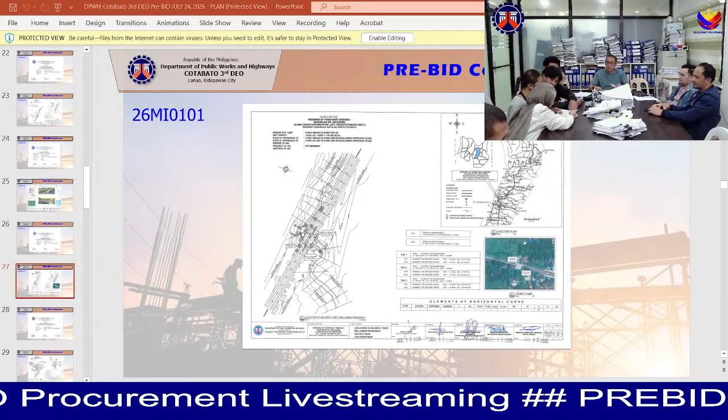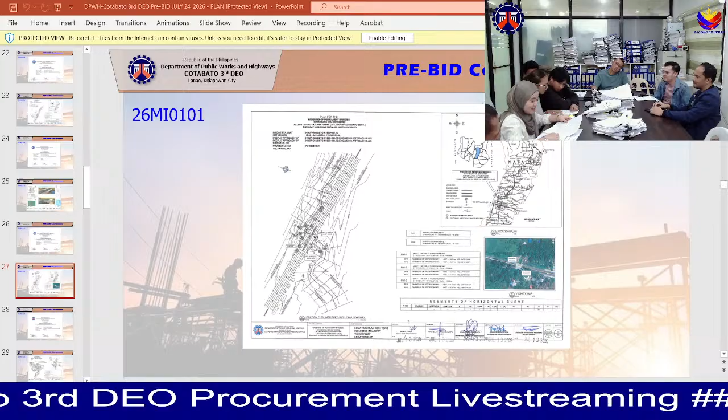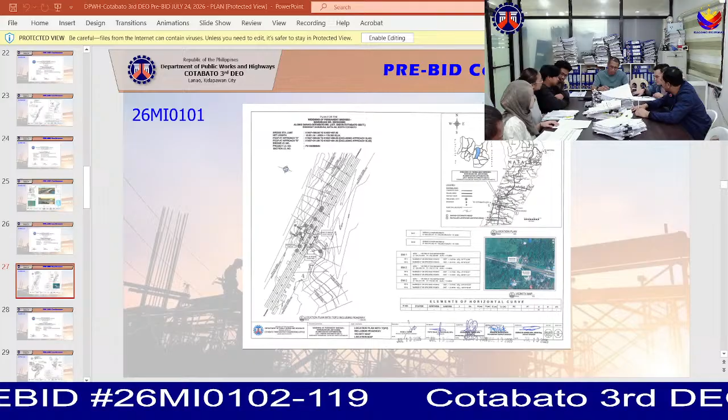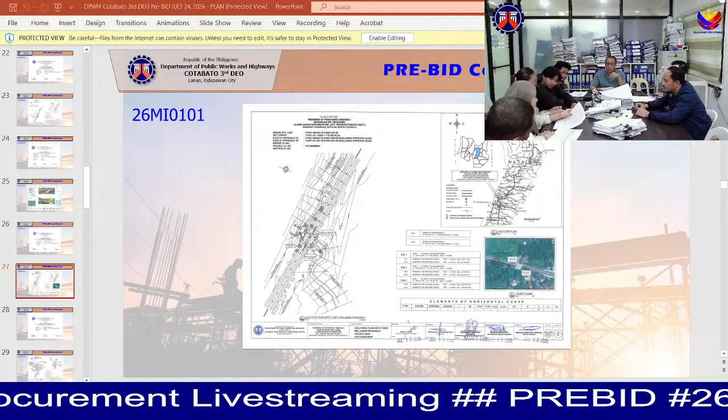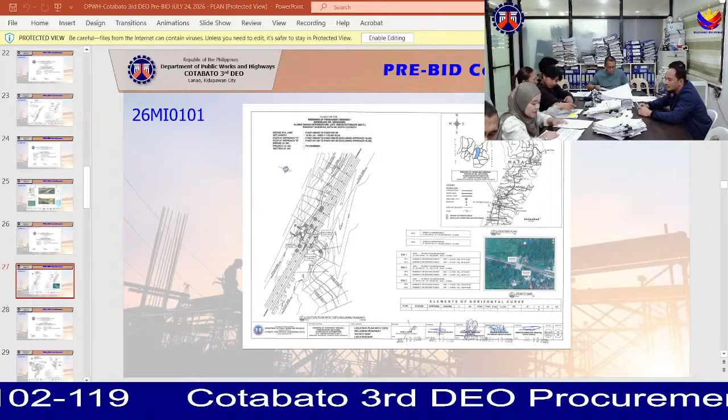So it is good afternoon po once again. For the 12th project with the contract ID number 26MI0102, the project name is Widening of Permanent Bridges, Mutian Bridge P00319MN along Bukidnon, Cotabato Road. The project location is at Barangay Carmen, Cotabato.

The contract duration is 812 calendar days. The funding agreement is National Expenditure Program, CY 2026. The infra-type is Bridge, the target length is 341.055, and the unit of measure is per meter. The approved budget for the contract is 37,938,740 with an EL of 774,260. So the total estimated cost is 38,713,000.

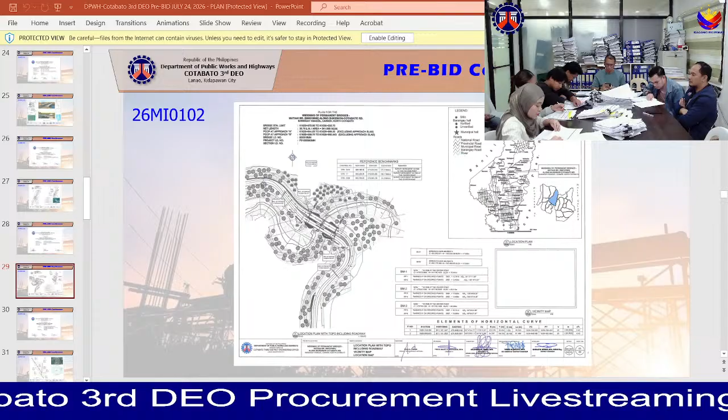The minimum equipment requirement for this project: one bulldozer, one payloader, one motorized road grader, one motorized road grader with scarifier, one vibratory roller, one plate compactor, one crawler crane 21 to 25 MT, one crawler crane 36 to 40 MT, one crawler crane with bucket, one truck-mounted crane 31 to 35 MT, one truck-mounted crane 41 to 45 MT, one truck-mounted crane 51 to 60 MT, one backhoe with breaker, one diesel hammer, one vibro hammer.

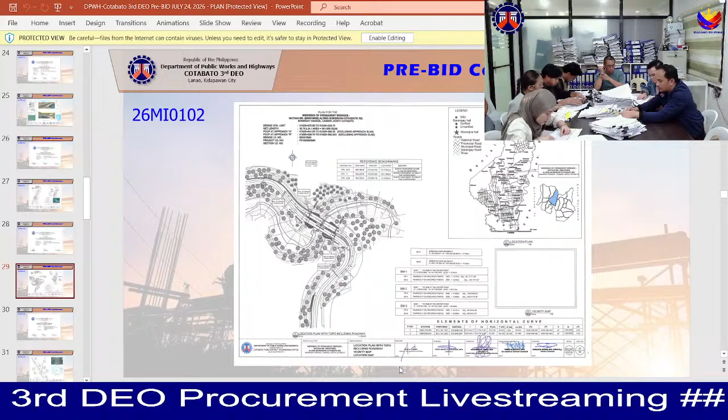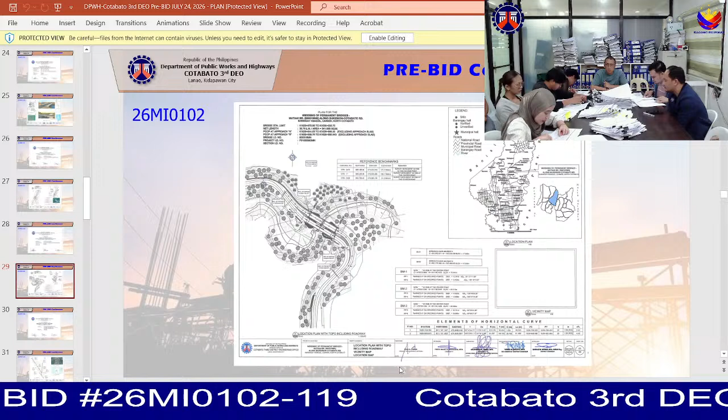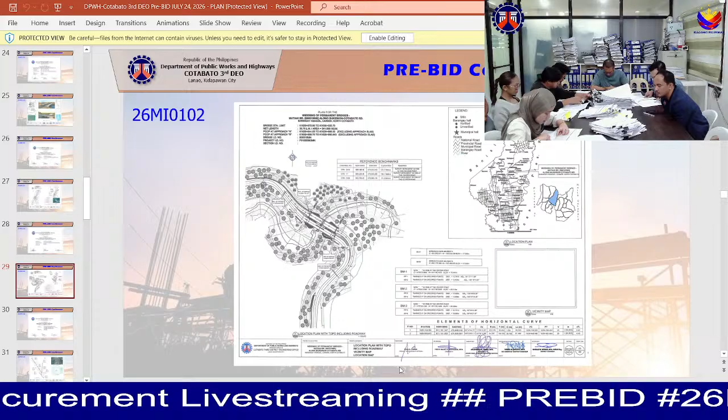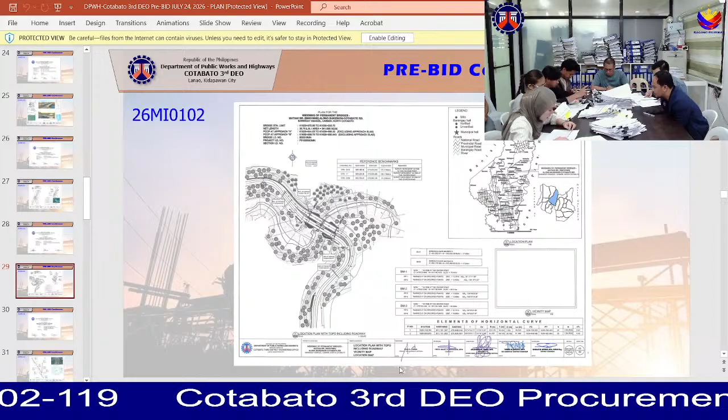One bagger mixer, two transit mixer, two dump truck, one cargo service truck, one cargo truck 9 to 10 MT, one water truck or pump, one air compressor, one welding machine 500A, one welding machine electrical driven, one cutting outfit, one chainsaw, two concrete vibrator, one bar cutter single phase, one bar bender 3-phase, one concrete batch plant, one applicator machine, one drop hammer, one dolly, two jackhammer, one milling machine, and one wood or steel ladder.

For the 13th project, we have contract number 26MI0103, concreting of road, Santos Street from Rambutan Street to Natsam Street, Barangay Poblacion, Carmen, Cotabato. Project location: Carmen, Cotabato. Contract duration: 120 days.

Description of works to be done: we have facilities for the engineer, other general requirements, earthwork, subbase and base course, surface courses, bridge construction, drainage and slope protection structures, miscellaneous structures, and materials testing.

Other facilities for the engineer: construction of office for the engineer, project billboard, the signboard, occupational safety and health program, traffic management, mobilization and demobilization.

Under earthwork, we have clearing and grubbing, structure excavation common soil, pipe culvert and drain excavation common soil, embankment from borrow common soil, embankment from roadway or structure excavation common soil, and subgrade preparation common material.

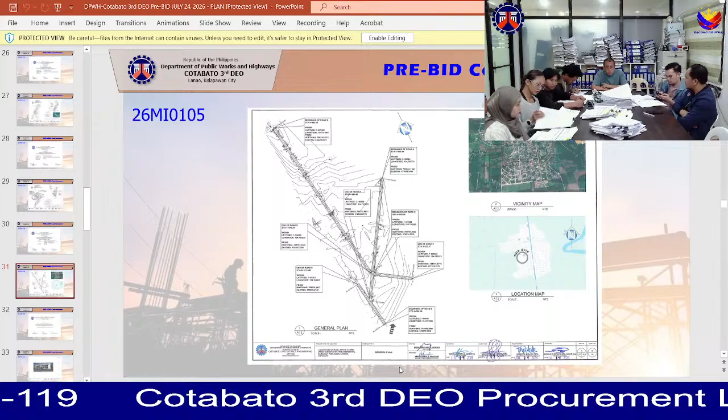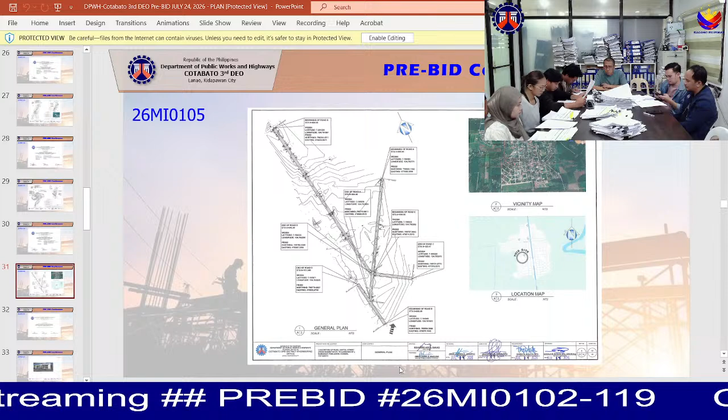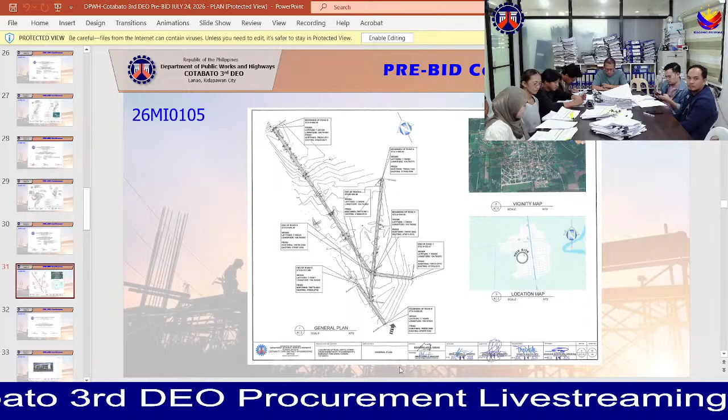Minimum equipment requirement: two dump trucks, one payloader, one loader, one motorized grader, one vibratory roller, one water truck or pump, four transit mixers, two concrete vibrators, one concrete batching plant, one concrete grader, one concrete saw, one bar cutter, one bar bender, one cargo service truck, one bagger mixer, one plate compactor, one cargo service truck 550, one applicator machine 181.

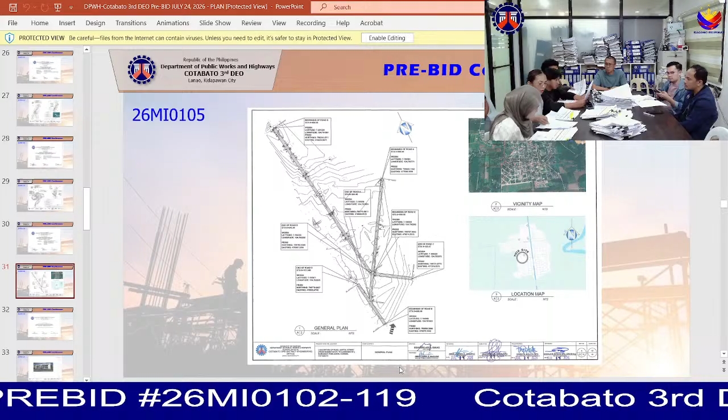The infra type is building, target amount of 1 unit measured in unit. Total construction cost of 14,500,000, with a DEO of 500,000, and a total estimated cost of 15 million.

Works to be done are facilities for the engineer, other general requirements, earthworks, reinforced concrete, finishing and other civil works, electrical, and mechanical.

Under facilities for the engineer is construction of field office for the engineer. Under other general requirements are permits and clearances, the project billboard and signboard, occupational safety and health, and mobilization and demobilization. Under earthworks are structure excavation common soil, embankment from roadway or structure excavation,

embankment from borrow, and gravel fill.

Under reinforced concrete are structural concrete class A 28 days, reinforcing steel deformed grade 40, reinforcing steel deformed grade 60, and formworks and falseworks.

Under finishing and other civil works are the ceiling 4.5 mm metal frame fiber cement board, modular partition, carpentry and joinery works, corrugated pre-painted steel door, tempered glass 12 mm, glass and glazing, glazed tiles and trims, CHB non-load bearing 100 mm, CHB non-load bearing 150 mm,

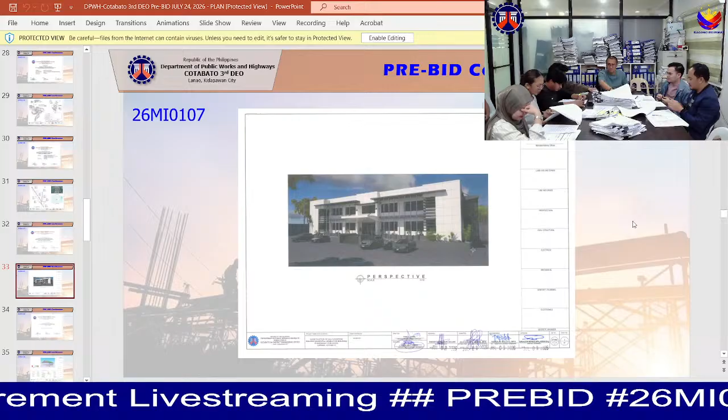Minimum equipment requirement: 1 backhoe, 2 dump trucks, 1 lead compactor, 1 bagger mixer, 1 bar cutter 25 mm maximum rebar diameter, 1 bar bender 25 mm maximum rebar diameter 3 phase, 2 welding machines, 1 cutting outfit, 1 truck mounted crane, and 1 concrete vibrator.

For the 15th project with contract ID 26MI-0108, construction of Barangay Church at Barangay Pisan, Kabacan, Cotabato. Project location: Barangay Pisan, Kabacan, Cotabato, with 120 calendar days.

Funding agreement 2026. Infra type building, target amount 1 unit measured in unit. Approved budget of the contract is 4,950,000, with a DEO of 50,000, and the project component cost is 5 million.

Description of works to be done: facilities for the engineer, other general requirements, earthwork, reinforced concrete, finishing and other civil works, electrical. Under facilities for the engineer, we have construction of field office for the engineer.

Under other general requirements, we have permits and clearances, project billboard or signboard, occupational safety and health, mobilization or demobilization. Under earthwork, we have structural excavation common soil, embankment from roadway or structure excavation common soil, embankment from borrow common soil,

gravel fill. Under reinforced concrete, we have structural concrete class A 28 days, reinforcing steel deformed grade 40, reinforcing steel deformed grade 60, reinforcing steel plain or round,

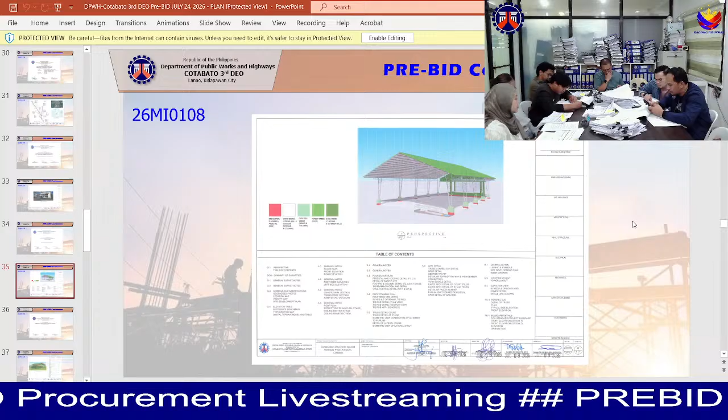For the minimum equipment requirement, we have one backhoe, one bar bender, one bar cutter, one concrete vibrator, two dump trucks, one cutting outfit, one bagger mixer, one lead compactor, one truck mounted crane, and two welding machines.

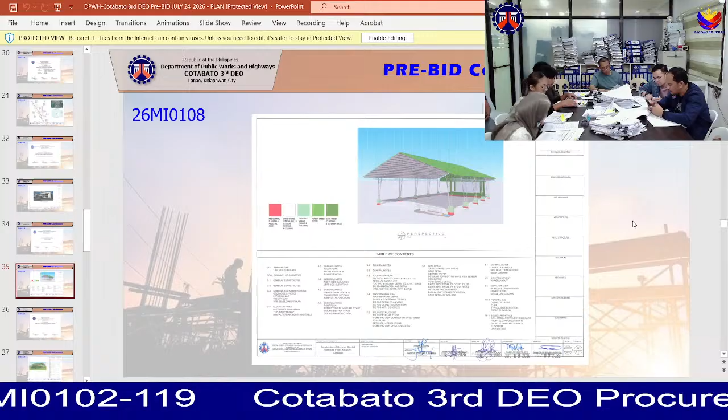The facilities for the engineer, we have construction of field office for the engineer. Under other general requirements, we have permits and clearances, project billboard or signboard, occupational safety and health, mobilization or demobilization.

Under reinforced concrete, we have structural concrete class A, reinforcing steel, and formworks and falseworks.

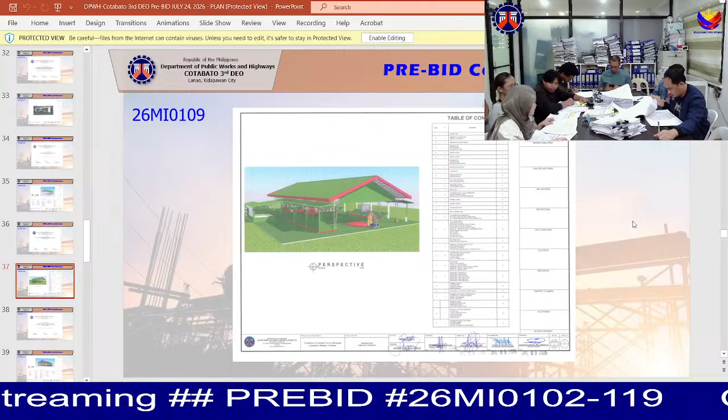Minimum equipment requirement: one backhoe, one bar bender, one bar cutter 25 mm maximum rebar single phase, one concrete vibrator flexible shaft type 2-inch head with 5 horsepower gas unit, two dump trucks, one jackhammer, one concrete cutting outfit, one bagger mixer, one plate compactor, one truck mounted crane standard lattice boom, and two welding machines electrical driven.

For the 17th project with the contract ID number 26MI0110, the project name is completion or rehabilitation of multi-purpose building covered court in Barangay Lower Paatan, Kabacan, Cotabato. The project location is at Barangay Lower Paatan, Kabacan, Cotabato.

The contract duration is 120 calendar days. The funding agreement is valid until 2026. The infra type is building, target amount is 1, unit of measure.

The approved budget for the contract is 4,950,000 with an EL of 50,000, so the total estimated cost is 5 million pesos. The description of works to be done for this project are facilities for the engineer, other general requirements, earthwork, reinforced concrete, finishings and other civil works, and electrical.

The itemized breakdown. Under the facilities for the engineer, we have construction of office for the engineer. Under the other general requirements, we have permits and clearances, project billboard or signboard, occupational safety and health, and mobilization or demobilization. Under the earthworks, we have removal of structures and obstruction, structure excavation common soil.

Embankment from roadway or structure excavation common soil, embankment from borrow common soil, and gravel bedding. Under the reinforced concrete, we have structural concrete class A 28 days, reinforcing steel deformed grade 40, and formworks.

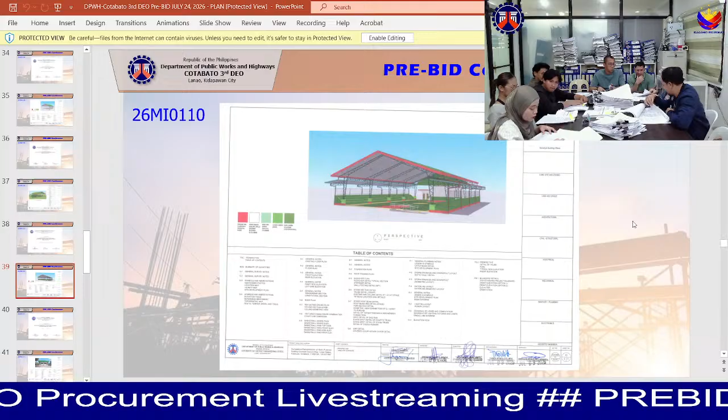Glass windows, wooden doors and windows, fabricated metal roofing accessory gauge 26 0.551 mm flashing, fabricated metal roofing accessory gauge 24 0.701 mm gutters, pre-painted metal sheets above 0.47 mm corrugated type long span, glazed tiles and trims, unglazed tiles.

Cement plaster finish, painting works masonry or concrete, painting works steel, textured finish, CHB non-load bearing including reinforcing steel 100 mm, metal structure accessories, structural steel trusses, and structural steel purlins.

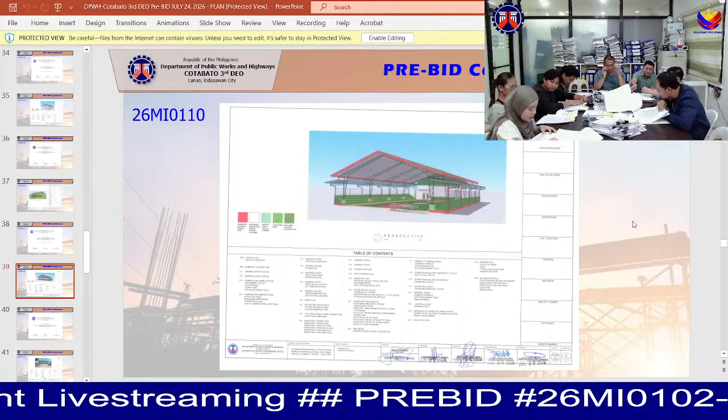Under the electrical, we have conduits, boxes and fittings conduit works, unit boxes, wires and wiring devices, panel board with main and branch breakers, and lighting fixtures.

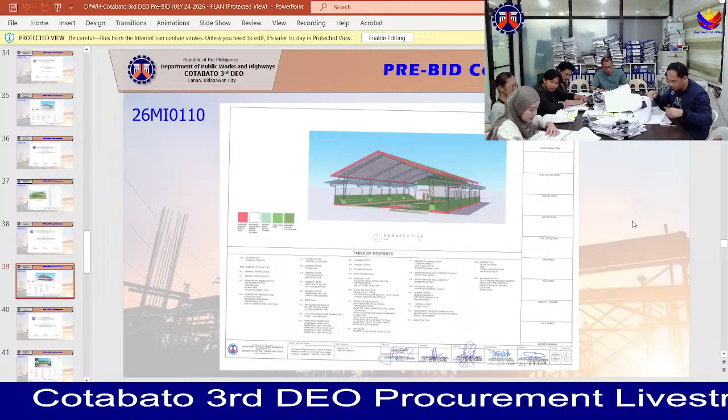For the minimum equipment requirement, we have one backhoe, one bar bender, one bar cutter, one concrete vibrator, two dump trucks, one jackhammer, one concrete cutting outfit, one bagger mixer, one plate compactor, one truck mounted crane 21 to 25 MT, and two welding machines.

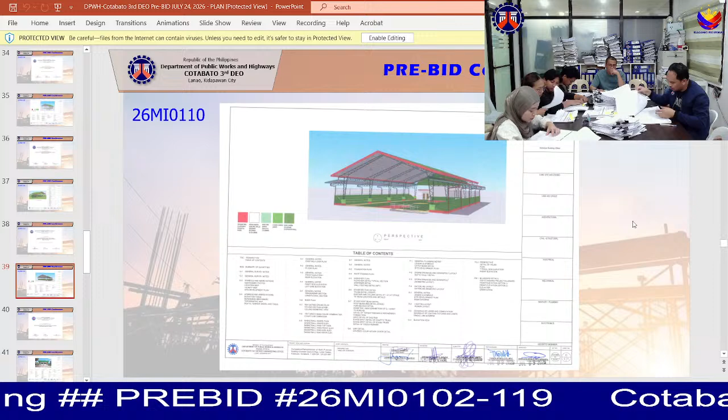For the 18th project, the contract ID is 26MI0111 with the project name of construction and completion of daycare center at Barangay Kabayaman, Balisinan, Cotabato. Project location is at Barangay Kabayaman, Balisinan, Cotabato with a contract duration of 100 calendar days.

With the funding agreement under General Appropriation Act 2026, infra type of building, target amount is 1, and unit of measure is unit. Total construction cost of 2,970,000 with an EL of 30,000 with a total estimated cost of 3 million.

Works to be done are facilities for the engineer, other general requirements, earthwork, reinforced concrete, finishing and other civil works, electrical and mechanical. The facilities for the engineer is the construction of field office for the engineer.

Under the other general requirements are the permits and clearances, the project billboard and signboard, the occupational safety and health, and the mobilization and demobilization.

Under the earthwork or the removal of structures and obstruction are the structure excavation, the embankment from roadway, structure excavation, the embankment from borrow, and the gravel fill.

Under the reinforced concrete is the structural concrete class A 28 days, the reinforced steel deformed grade 40, and the formworks and falseworks. Under the finishing and other civil works are the catch basin concrete, sewer line works, the storm.

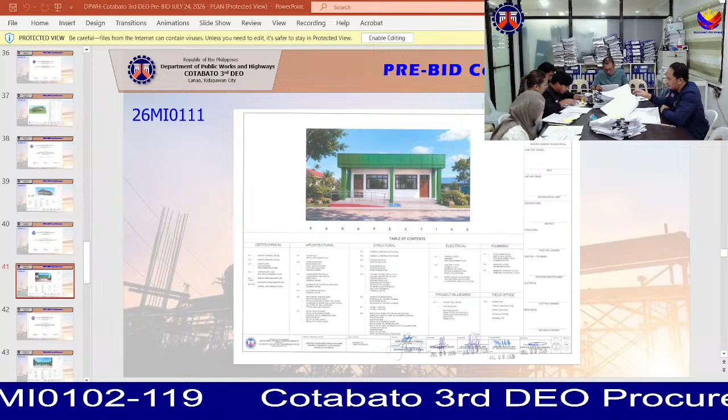Coordinates 6.848724, 124.981747. Project location Barangay Banayan, Tulunan, Cotabato, with a contract duration of 150 calendar days. Funding agreement, General Appropriation Act 2026. Infra type building, target amount 1, unit of measure unit.

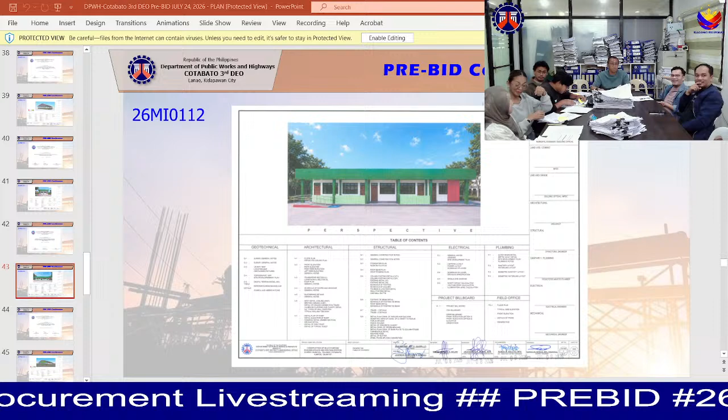With an approved budget of the contract of 9,900,000, EAW of 100,000, and estimated project component cost of 10 million.

Description of works to be done: facilities for the engineer, other general requirements, earthwork, reinforced concrete, finishing other civil works, electrical and mechanical. Under facilities for the engineer, we have construction of field office for the engineer.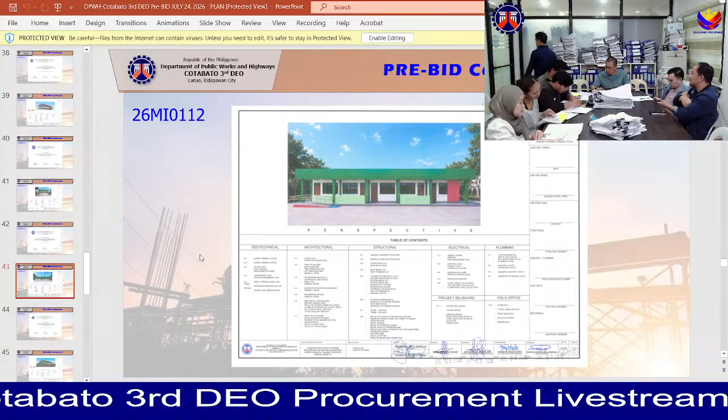Under other general requirements, we have permits and clearances, project billboard and signboard, occupational safety and health, mobilization or demobilization. Under earthwork, we have excavation common soil, embankment from roadway or structure excavation common soil, embankment from borrow common soil.

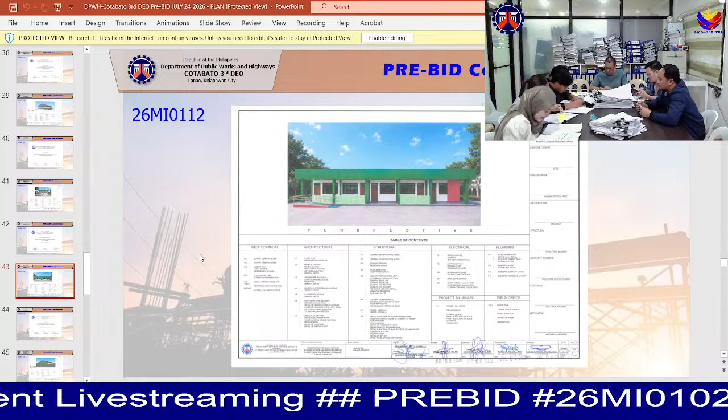Septic vault or tank, concrete or CHB, plumbing fixtures, cold water line, ceiling 4.5 mm metal frame, fiber cement board, ceiling metal frame perforated metal panel, aluminum glass windows, wooden doors and windows, fabricated metal accessories gauge 24, 0.7 mm, perforated metal sheets.

Long span corrugated type above 0.27 mm, glazed tiles in place, unglazed tile, glazed granite tiles, cement plaster finish, painting works masonry or concrete, painting works steel, reflective insulation, aluminum cladding, CHB non-load bearing including reinforcing steel 100 mm.

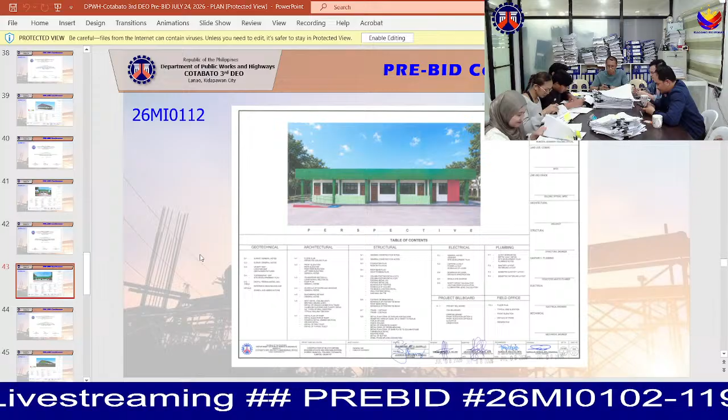CHB non-load bearing including reinforcing steel 150 mm, metal structure accessories, structural steel trusses, structural steel purlins. Under electrical we have conduits, boxes and fittings, conduit works or conduit housing, wires and wiring devices, panel board with main and branch breakers, lighting fixtures. Under mechanical we have oscillating fan, fire extinguisher 9.07 kg ABC bracket, and fire alarm system.

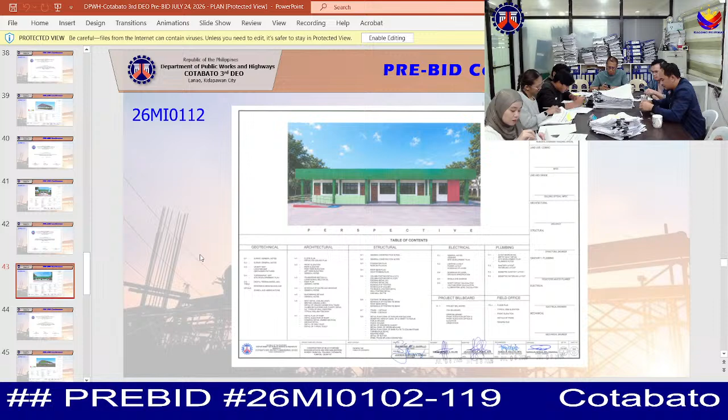For the minimum equipment requirement, we have one backhoe, one bar bender, one bar cutter, one concrete vibrator, one cutting outfit, two dump trucks, one bagger mixer, one plate compactor, one truck mounted crane, and two welding machines.

Project location: Barangay Taguranao, Matalam-Lampayan. Contract duration is 130 calendar days. Funding agreement is for 2026.

The target amount is 1, with a unit of measure of unit. The total approved budget for the contract is...

4,950,000 with an EO of 50,000 and a total estimated cost of 5 million.

Description of works to be done: facilities for the engineer, other general requirements, earthwork, reinforced concrete, finishings and other civil works, electrical and mechanical.

Under facilities for the engineer, we have construction of field office for the engineer. Under other general requirements, we have permits, clearances, project billboard or signboard, occupational safety and health, mobilization and demobilization.

Under earthwork, we have removal of structure and obstruction, structure excavation common soil, embankment from roadway or structure excavation common soil, embankment from borrow common soil, and gravel fill.

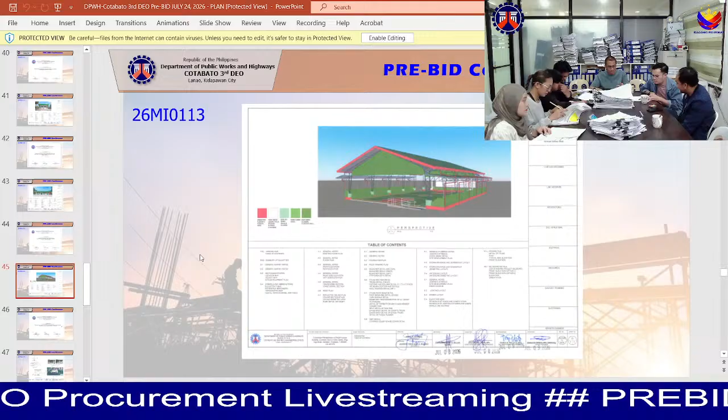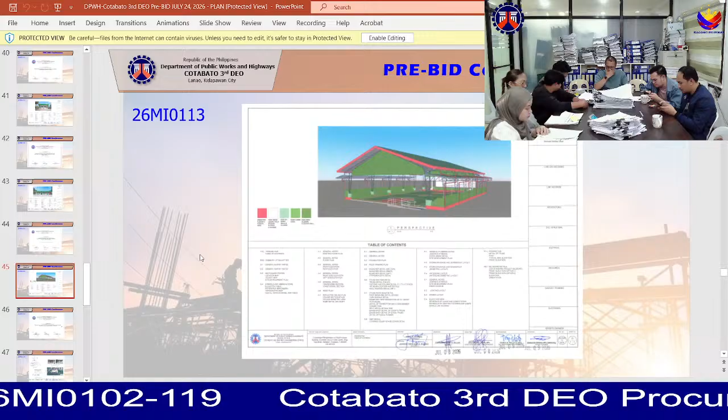Under electrical, we have conduits, boxes and fittings, wires and wiring devices, panel boards with main and branch breakers, and lighting fixtures. Under mechanical, we have ventilation equipment.

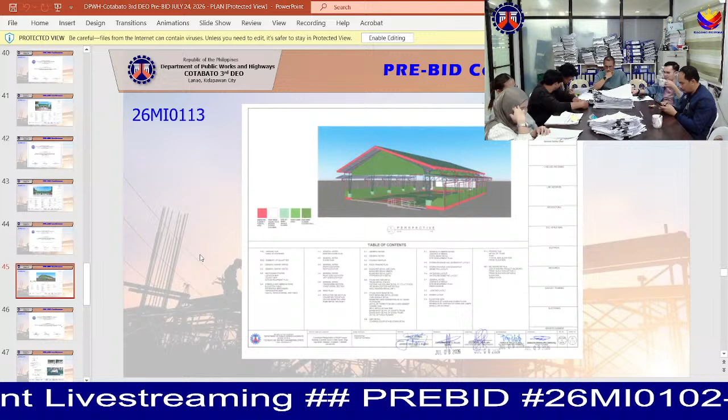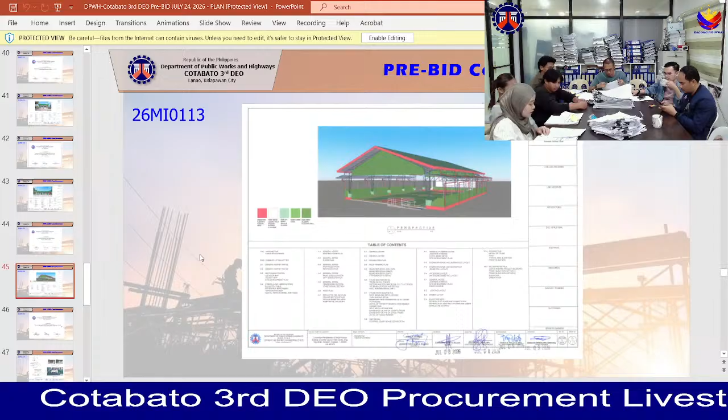For the next project with contract ID 26MI0114, the project name is Construction/Completion of Multi-Purpose Building, Covered Court, Barangay New Panay, Pigcawayan, Cotabato.

Coordinates 6.85187, 124.932762. The project location is Barangay New Panay, Tulunan, Cotabato. The contract duration is 130 calendar days.

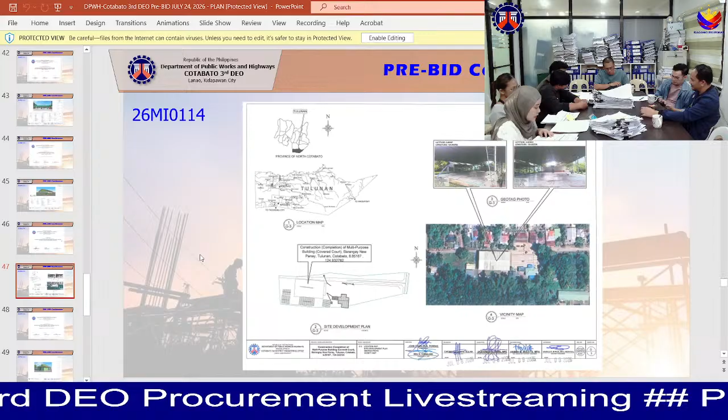The funding activity is for 2026. The infra type is building. The target amount is 1, and the unit of measure is unit.

The approved budget for the contract is 4,950,000 with an EO of 50,000. So the total estimated cost is 5 million pesos.

The description of work to be done for this project: facilities for engineer, other general requirements, earthwork, reinforced concrete, finishings and other civil works, electrical and mechanical.

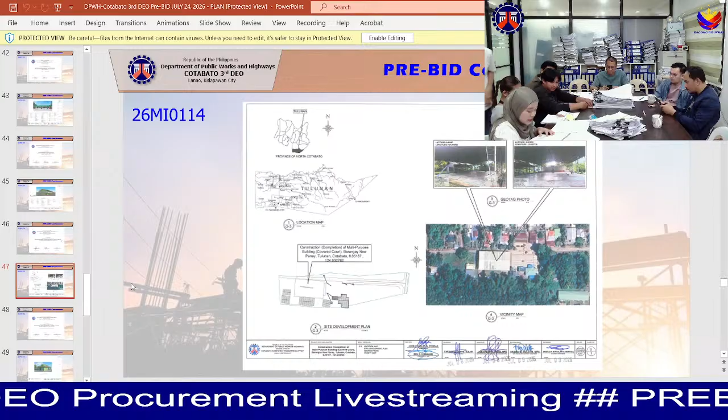The itemized breakdown: under facilities for the engineer, construction of field office for the engineer. Under other general requirements, we have permits and clearances, project billboard or signboard, occupational safety and health, and mobilization or demobilization.

Under earthwork, structure excavation common soil, embankment from roadway or structure excavation common soil, embankment from borrow common soil, and gravel fill.

Under reinforced concrete, structural concrete class A 28 days, reinforcing steel deformed grade 40, formworks and falseworks. Under finishings and other civil works, catch basins, CHP, sewer line works, storm drainage and downspout.

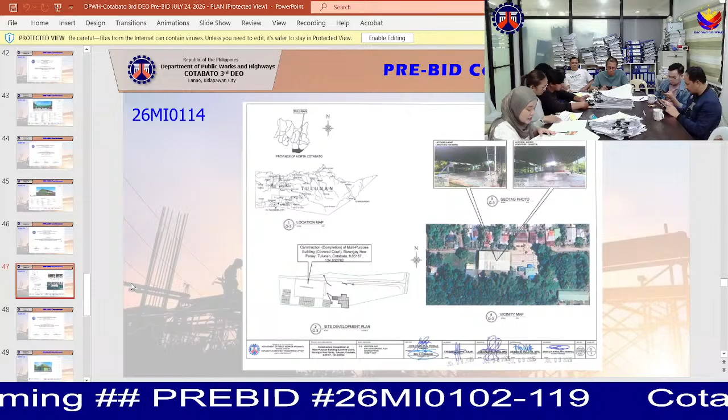Plumbing fixtures, cold water lines, ceiling 4.5mm metal frame fiber cement board, ceiling metal frame pre-painted metal panel, aluminum glass windows, wooden doors and windows, fabricated metal roofing accessory gauge 26, 0.551mm flashing.

Fabricated metal roofing accessory gauge 24, 0.701mm gutters, pre-painted metal sheets above 0.427mm corrugated tile long span, glazed tiles and trims, unglazed tiles, synthetic granite tiles, floor topping plain, cement plaster finish, painting works masonry or concrete, painting works steel, textured finish.

Aluminum cladding, CHB non-load bearing including reinforcing steel 100mm, CHB non-load bearing including reinforcing steel 150mm, metal structural accessories, structural steel trusses, and structural steel purlins.

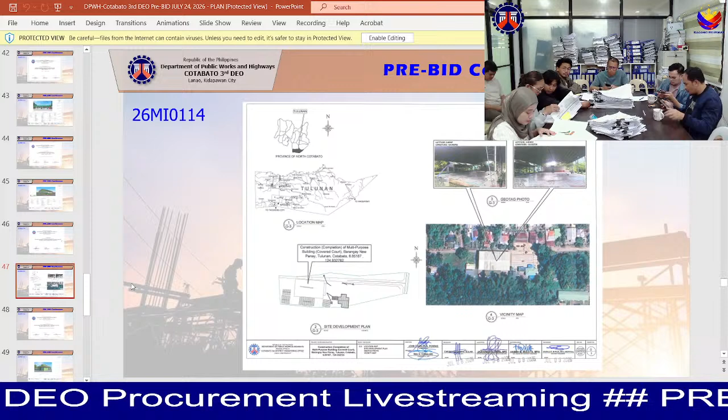Under mechanical, we have ventilators.

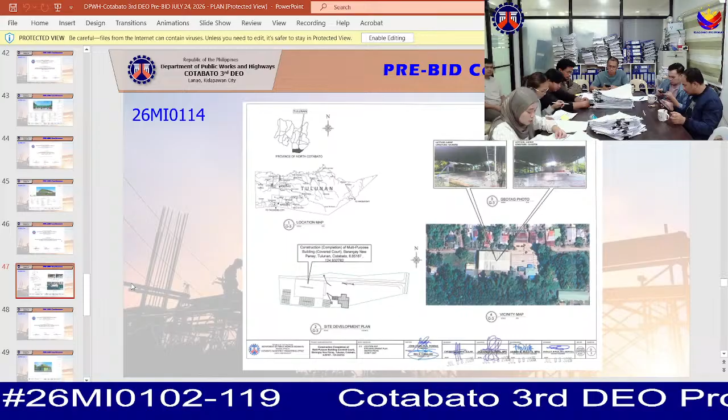For the minimum equipment requirement for this project: one backhoe, one bar bender, one bar cutter, one concrete vibrator, two dump trucks, one jackhammer, one cutting outfit, one power mixer, one plate compactor, one truck mounted crane, and two welding machines.

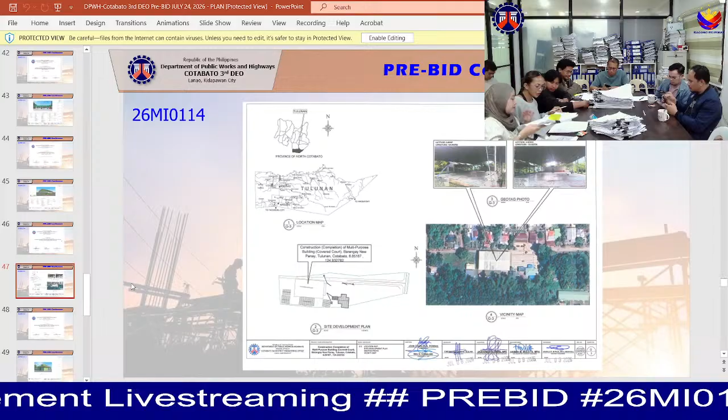For the next project with contract ID 26MI0116, the project name is Construction of Multi-Purpose Facility, Barangay Poblacion, Tulunan, Cotabato.

Coordinates 6.827386, 124.877497, project location Barangay Poblacion, Tulunan, Cotabato, with a contract duration of 195 calendar days.

The funding agreement is for 2026, with an infra type of building, target amount is 1, and unit of measure is unit. The total construction cost is...

16,830,000, with an EO of 170,000, with a total estimated cost of 17 million.

Works to be done are facilities for the engineer, other general requirements, earthworks, reinforced concrete, finishings and other civil works, and electrical.

Under the facilities for the engineer, it is the construction of field office for the engineer. Under the other general requirements are the permits and clearances, the project billboard signboard, the occupational safety health, and the

mobilization and demobilization. Under the earthworks are the structure excavation, common soil, the embankment from roadways or structure excavation, common soil, the embankment from borrow, common soil, and the gravel fill.

Under the reinforced concrete are the structural concrete class A 28 days, the reinforcing steel deformed grade 40, the reinforcing steel deformed grade 60, the reinforcing steel plain or round bars, and the formworks and false works.

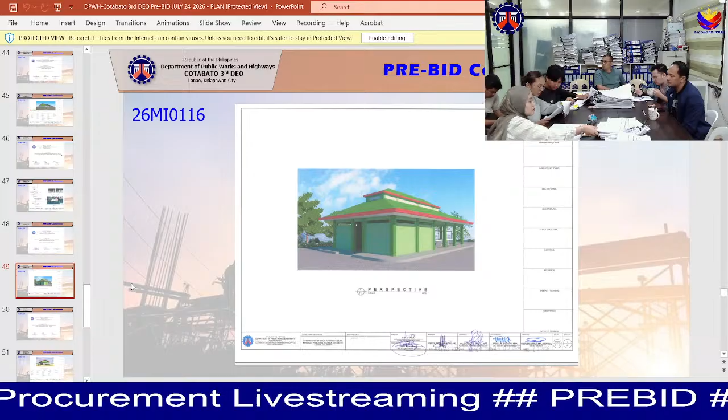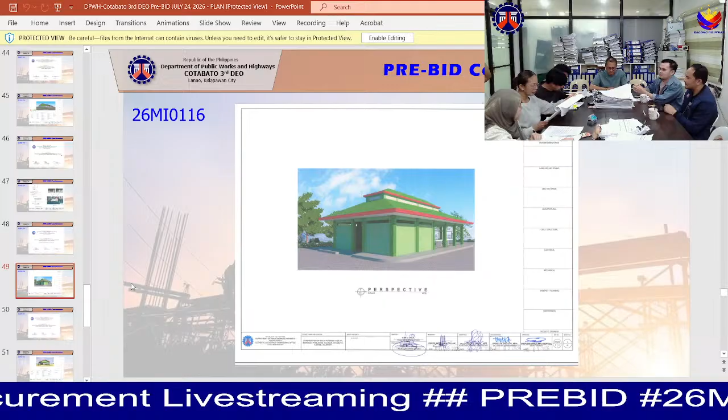The minimum equipment requirements are 1 backhoe, 2 dump truck, 1 plate compactor with 5 horsepower, 1 bagger mixer, 1 bar cutter 25 mm bar diameter single phase, 1 bar bender 25 mm bar diameter 3 phase, 2 welding machine, 1 cutting outfit, 1 truck mounted crane standard telescopic boom, and 1 concrete vibrator mechanical chop type.

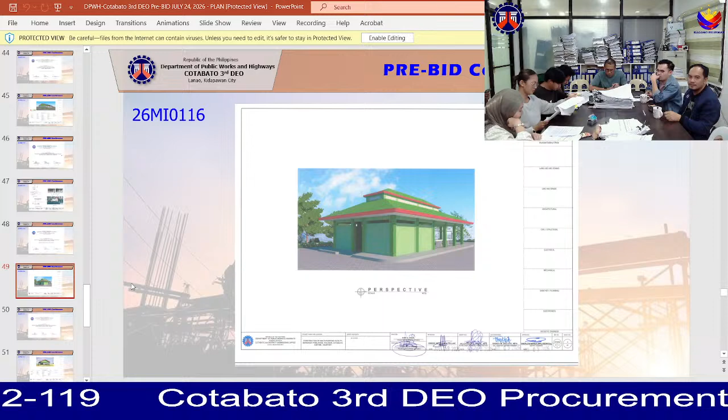For the 23rd project, the contract ID of 0117, construction of multi-purpose facility in Barangay Sinsin, Tulunan, Cotabato, coordinates 6.82245, 124.895962. Project location Barangay Sinsin, Tulunan, Cotabato.

Contract duration of 130 calendar days. Funding agreement, General Appropriations Act 2026. Infra type, target amount 1 unit. Approved budget for the contract 4,950,000 with an EL of 50,000. Project component cost 5 million.

Description of works to be done: facilities for the engineer, other general requirements, earthwork, reinforced concrete, finishing and other civil works, electrical. Under facilities for the engineer, we have construction of field office for the engineer. Other general requirements: permits and clearances, project billboard or signboard, occupational safety and health, mobilization or demobilization.

Under earthwork, we have structural excavation common soil, embankment from roadway or structural excavation common soil, embankment from borrow common soil, gravel fill. Under reinforced concrete, we have structural concrete class A 28 days, reinforcing steel deform grade 40,

and formworks and false works. Under finishing and other civil works, we have catch basins CHB, storm drainage and downspout, ceiling 4.5 mm metal frame fiber cement board, fabricated metal roofing accessories gauge 26, 0.551 mm flashing, fabricated metal roofing accessories gauge 24

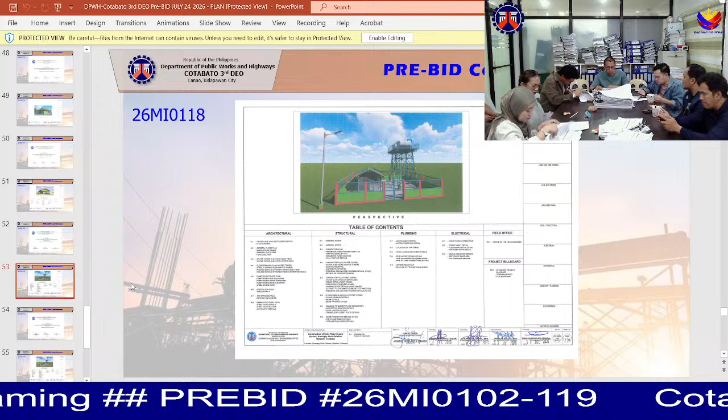Under electrical, we have solar panel with inverter, battery, and other devices, and lighting fixtures. Under mechanical, we have water pumping system, submersible sump pump with control. Under water supplies, we have polyethylene plastic pipe and valve.

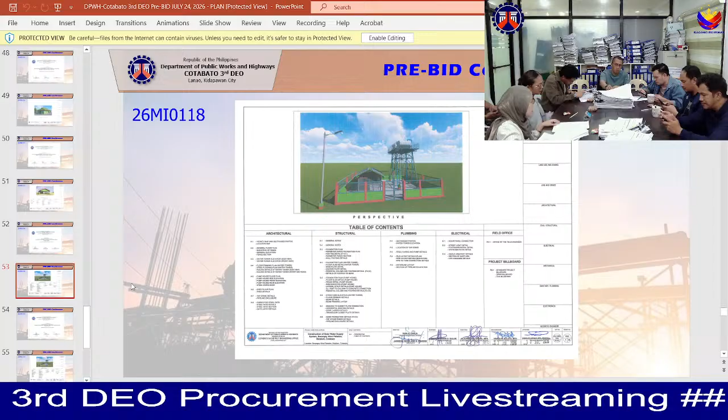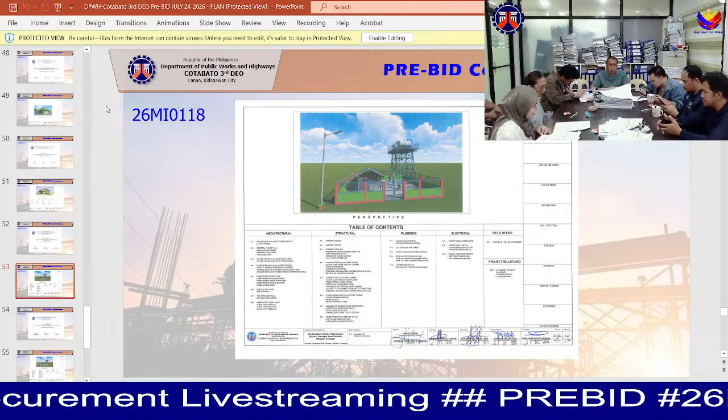Under minimum equipment requirement, we have one backhoe, one bar bender 28 mm maximum rebar diameter 3 phase, one bar cutter 25 mm maximum rebar diameter grade 40 single phase, one boom truck, one cargo truck, one concrete vibrator, one drilling rig, two dump trucks, one cutting outfit, one bagger mixer, one plate compactor, one truck mounted crane standard lattice, and two welding machines, electrical and electric.

So for the 25th project with contract ID number 26MI0119, the project name is construction of solar water supply system, Sitio Tuburan, Barangay Bunawan, Tulunan, Cotabato. The project location is at Barangay Bunawan, Tulunan, Cotabato. The contract duration is 120 calendar days. The funding agreement is GAA FY 2026. The infra type is water supply system.

The target amount is 1. The unit of measure, the approved budget for the contract is 4,950,000 with an EL of 50,000, so the total estimated cost is 5 million.

The description of work to be done for this project: facilities for the engineer, other general requirements, earthwork, reinforced concrete, finishings and other civil works, electrical, mechanical, and water supply.

For the itemized breakdown, under facilities for the engineer, we have construction of field office for the engineer. Under other general requirements, we have permits and clearances, project billboard or signboard, occupational safety and health, and mobilization or demobilization. Under earthwork, we have clearing and grubbing, structure excavation common soil, embankment from roadway or structure excavation common soil, embankment from borrow common soil, and gravel fill.

Under reinforced concrete, we have structural concrete class A 28 days, reinforcing steel deformed grade 40, and formworks and falsework. Under finishings and other civil works, we have pipes with fittings connection, floor drain plates 75 mm diameter stainless.

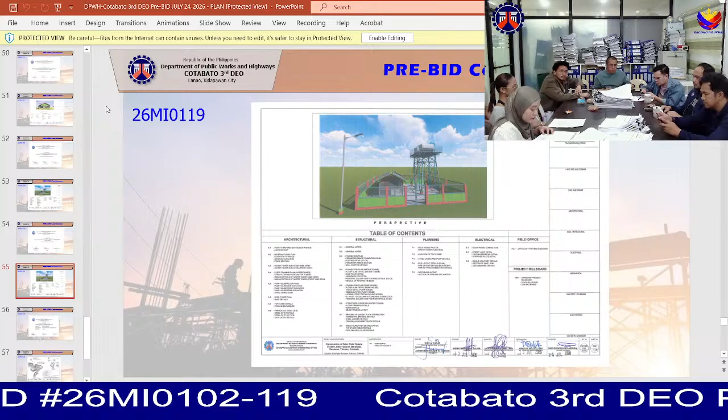Under electrical, we have solar panel with inverter, battery, and other devices, and lighting fixtures. Under mechanical, we have water pumping system, submersible sump pump with control. Under water supply, we have polyethylene plastic pipe and valve.

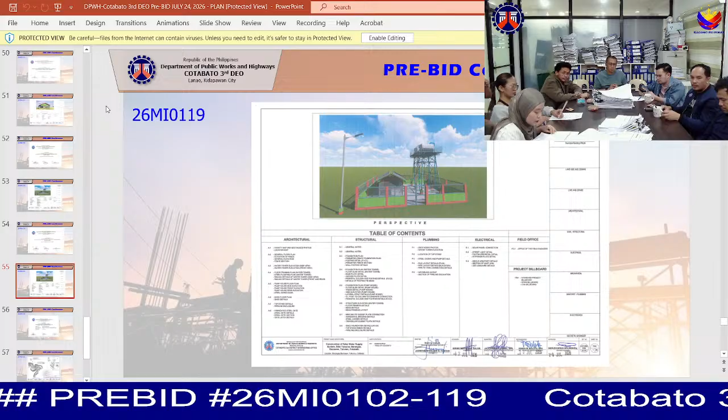For the minimum equipment requirements for the project: 1 backhoe, 1 bar bender, 1 bar cutter, 1 boom truck, 1 cargo truck, 1 concrete vibrator, 1 drilling rig, 2 dump trucks, 1 cutting outfit, 1 bagger mixer, 1 plate compactor, 1 truck mounted crane 21 to 25 MT, and 2 welding machines.

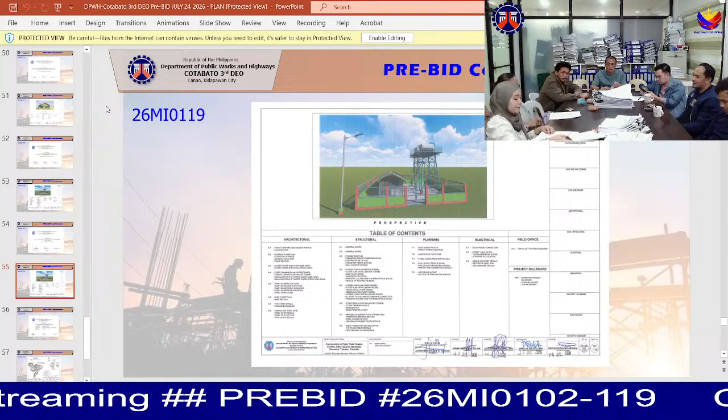So you will have to see to the requirements.

Now we can now... let's go back. Click, no? Okay, Mr. Chair, good afternoon. So for the additional announcements and instruction, so bid documents are... it's gone, sir, it got deleted from my PowerPoint. Gone, gone, not clicked, gone. It went somewhere else. Thank you.

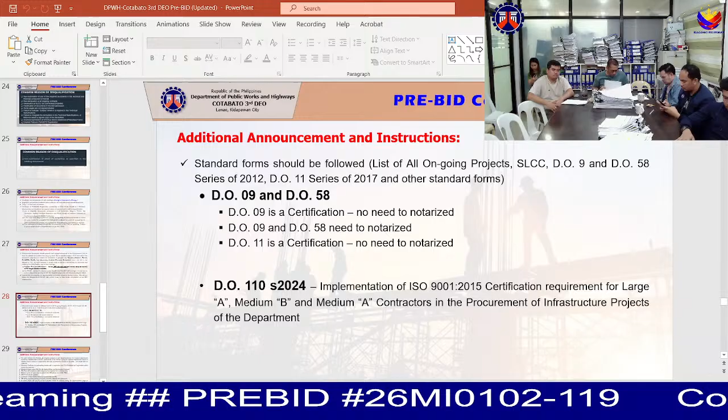In addition, standard forms should be followed - list of ongoing projects, SLCC, DO9 and DO58 series of 2012, DO11 series of 2017, and other standard forms. DO9 and DO58 are very significant because they need to be notarized - the format requires the notary public to affix their signature. DO9 and DO11 are just certifications, so what's needed there is just the signature, no need to notarize - just the signature of the authorized person.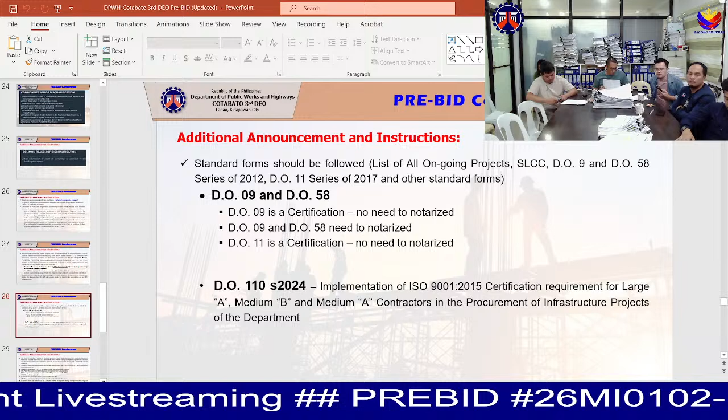Then DO 110 series of 2024 - this is the implementation of our ISO 9001-2015 certification requirement for large A, medium B, medium A, and onwards contractors in the procurement of infrastructure projects of the department. Meaning, exempted from the ISO certification requirement are only small A and small B - the rest need ISO certification.

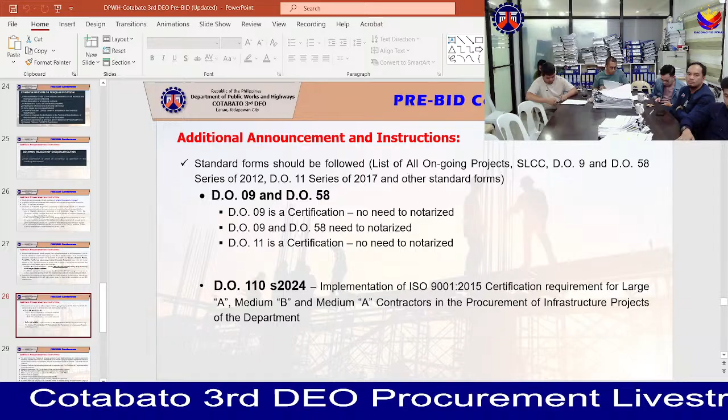For joint venture projects, all ongoing projects of both bidder and contractor need to be submitted. The required attachment should be included while on SLCC; attachment of the capable partner alone is enough. The two attachments are no longer needed.

Just the capable partner's attachment is enough. But for all ongoing projects, both partner A and partner B need to submit all attachments to prove that these contracts were indeed undertaken by them. This is a declaration, since it's still part of the NFCC computation.

The same criteria or requirements for sole proprietorship should be complied with. The JVA should also be notarized and have a special PCAB license. A Secretary's Certificate is required for participating bidders that are corporations, and a CDA certificate for cooperatives, which also need to be notarized.

For structural organization, we have 5 key personnel: the project manager, the project engineer, the materials engineer, the safety officer, and the construction foreman. These 5 need TINs, which are part of the requirements to be submitted to COA.

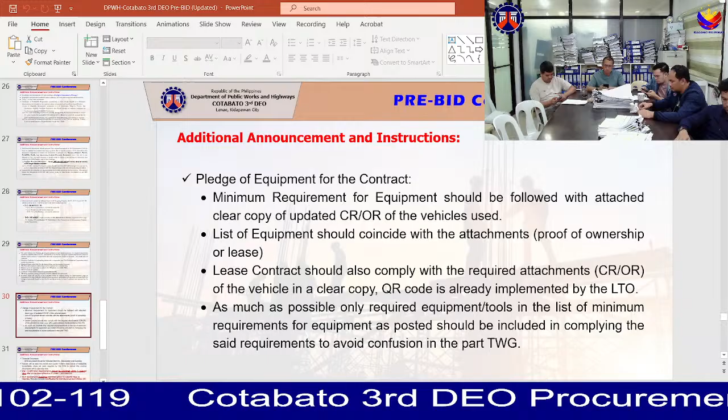For financial documents, the BOQ as posted should be followed - the item number, description, and quantity. If there's a discrepancy, it could become grounds for disqualification.

Notices will be sent through email and courier if there is a notice of ineligibility, immediately, since we are required by COA to submit contract documents within the prescribed time. So that's it.

Pag hindi nagtugma doon sa CWA sa result, pag may nag-fail doon or nag-expire, immediately mag-send kami ng notice of ineligibility sa inyo para magkaroon kayo ng motion for reconsideration. Then kung napatunayan na yung physical document ninyo is okay, papasok si request for unlocking doon sa CWA. So as much as possible, pakicheck po ng mga particulars doon sa CWA, baka may malapit na magpasok.

Sa gayon, may iwasan na tayo na ma-delay, especially doon sa nabigyan ng notice of lowest calculated bid, para magiging responsive tayo at ma-award sa inyo yung project, kung maaari walang nag-expire doon sa mga particulars ng CWA.

If ever na may nag-expire after sa bid opening, which is allowed naman, during sa post-qualification stage, kailangan ninyong isumite yung mga naturang requirement within 5 calendar days. 5 calendar days is different from 5 office days o office working days, kaya't kahit Sabado't Linggo is counted siya. So pag nag-lapse tayo doon sa 5 calendar days, pwede na kayong ma-DQ.